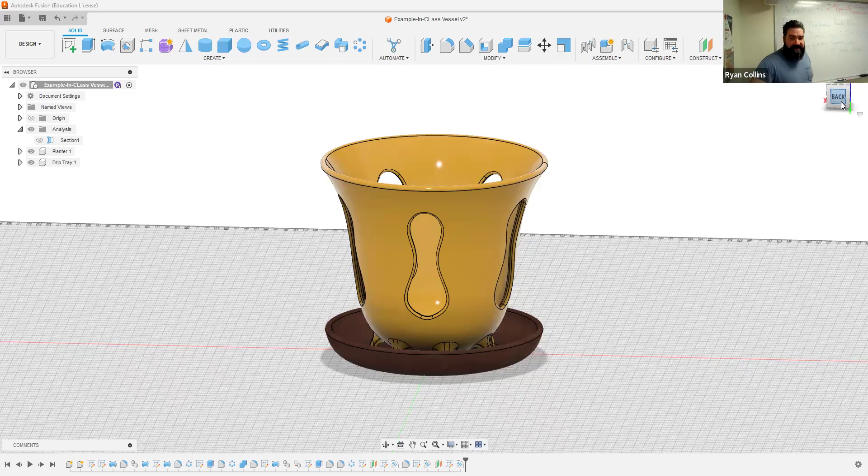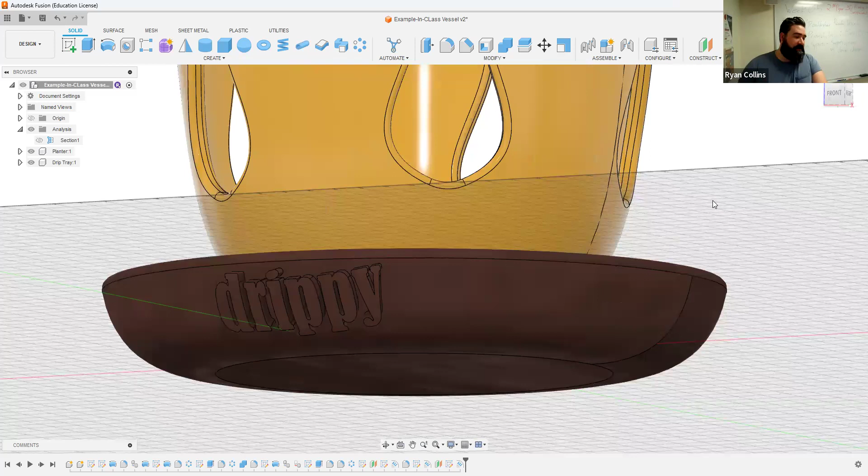All right, so we have our projects that we're working on, your revolved vessels. This is one of the ones that, of course, has holes through the sides, as well as using the revolve tool and patterns to create these little feet on the bottom. And of course, the drip tray as well. They're on separate bodies, they're separate components. The drip tray, old drippy, does in fact have text coming through on or through emboss.

Now, those are the advanced options. The requirement is simply that it needs to have a vessel with holes in the bottom and a tray, both of which were created with the revolve tool. In order to do that stuff, look at the other video.

But I wanted to talk tonight about some of the considerations for how you would go about printing something like this. With our previous projects, it's largely very flat and it kind of just goes right on the build plate. No problem. But with this, there's some considerations, mainly that something like this is going to require supports.

And I wanted to talk about ways you can minimize supports, simply because not that it's going to waste a lot of material, but it is wasted material. And if you're printing on your own, well, you're paying for your own material. And if there's a way to not waste as much, yay. So let's go ahead and kick these out of Fusion and get them onto our slicer.

So in order to do that, we just go to the object, whichever one it is. Now, you don't need to select the entire component. You can just double click on the object itself, but because these are separate components, you're good. If these were both bodies on the same component, double clicking will sometimes select everything within that component, at least body wise. It's not going to select sketches, stuff like that, but there you go.

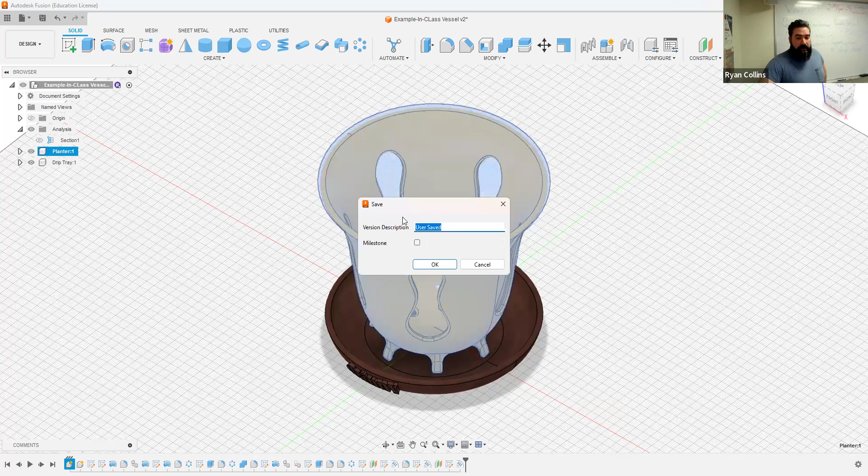Oops, not save. So in order to get that out, go to File. Now, again, we're going to 3D print, not to export. Export will save this as a Fusion 360 file, not as an STL. Now, we will discuss the differences between file types later, but for right now, this project, STL is fine. So we're going to 3D print.

Your toolbar comes up, and you can select preview mesh if you want. I don't bother. Refinement, high, sure, why not? Now, deselect the send to 3D print utility. You can send this directly to a slicer and it's all set, but I want to discuss some of the options built into the PrusaSlicer. So we're going to turn that off. Uncheck send to 3D print utility, you're all set.

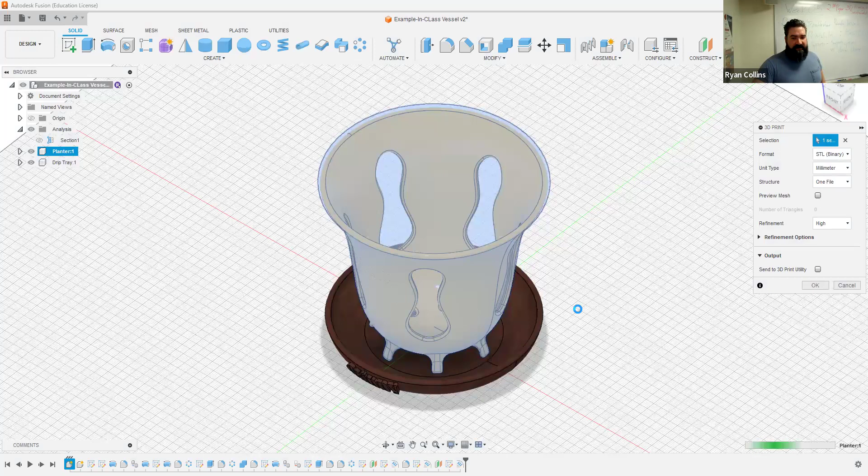Go to OK. All right, where's this going to go? Somewhere on your computer. Great. I have planter. Done. That's going to save. That's going to kick that out. And it automatically does that. I don't know why Fusion, sometimes when you complete a command, it keeps switching screens. I don't know why it's doing that.

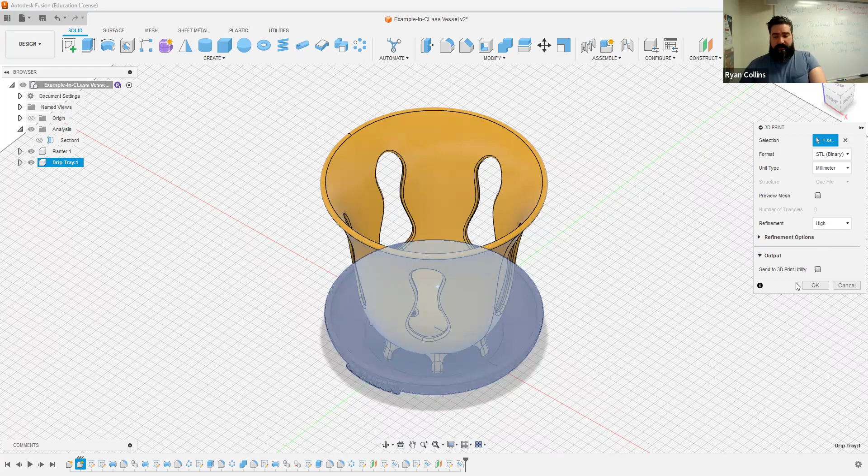Do the same for the drip tray. Double click. 3D print. It's going to save your last selection, meaning you do not have to uncheck send to 3D print utility every time, unless you have closed Fusion and are restarting it. Hit OK. Check the name, just in case you need to name anything. Now it's drip tray, so at least there's not just body 1 and body 2. Yes, replace it. I already had it in the file folder.

Okay, so now let me hop over to the PrusaSlicer. Again, I have an outdated version right now. Definitely update. I'm currently on 2.6. It's up to 2.7.1, so definitely update anytime you can. So let me drag and drop over. You can, of course, import a model, all that kind of stuff, or you can simply open up the file and drag and drop.

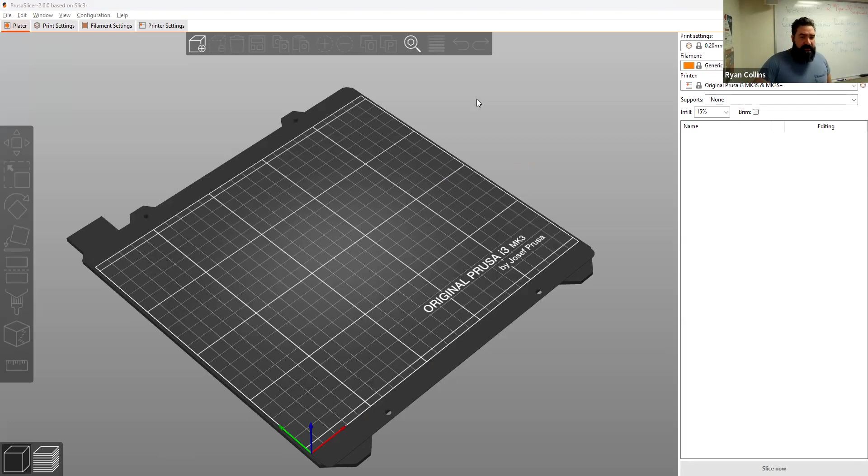Now, depending on how big your project is, you may not be able to get both on the same plate. And frankly, sometimes that's for the best, because if you are printing something that's much more complex and has multiple parts, yes, of course, the whole point is to be able to load multiple components, multiple objects onto your build plate so you don't have to babysit the whole thing.

If your print fails and you've got a 20-hour print with 2 different objects—say one takes 1 hour and the other 19 hours—I'd go ahead and print the 1-hour thing first, get it out of the way, then set up the 19-hour one. That way you're not waiting part of the way through, like 10 hours in, and having it fail and ruin both parts. Pick and choose your battles.

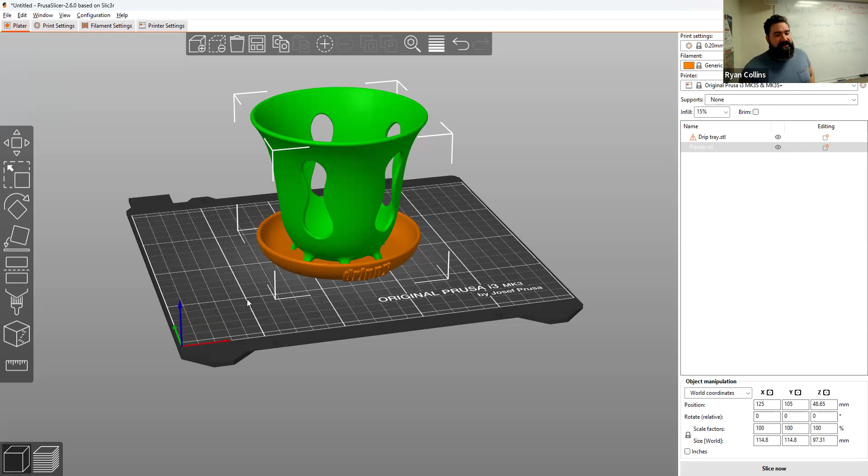Now, if you want them to be separate, you cannot print this as is. Go up to the top, you can either arrange by hand or select auto arrange, and that's just going to move them around.

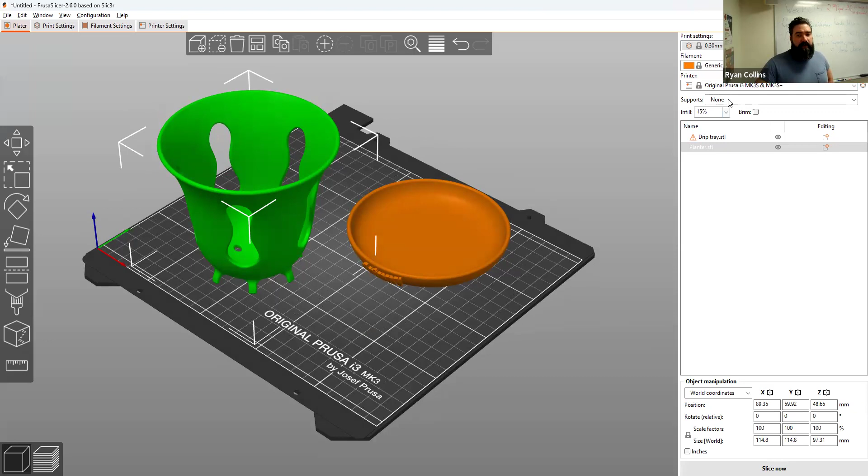So outright, we're going to go through problem areas. Right now, I could just use the standard settings, even go to draft quality to make it go faster. Currently it's selected with PLA, and we'll just leave it at 15% infill. That's fine, let's hit slice now and see what happens.

This will go fairly quickly, but the problem is you're going to have a lot of problems with this outright currently. So right now—well, that's surprising, that is less than 6 hours. That is a 5 hour and 36-minute print. That is frankly kind of impressive.

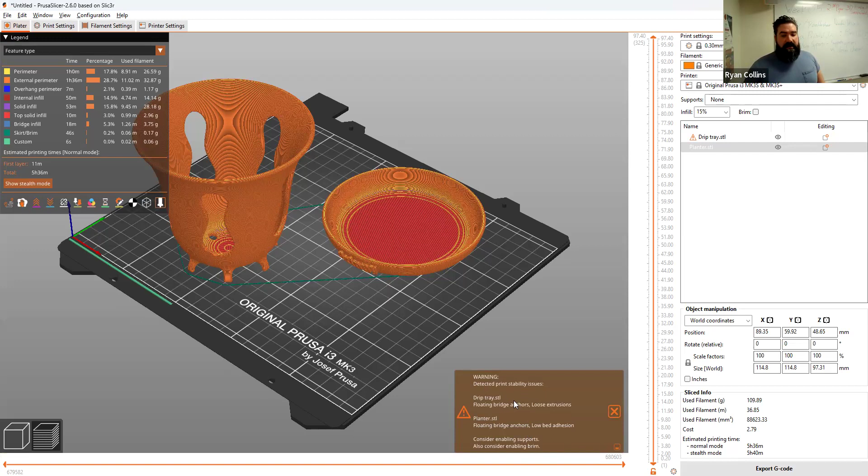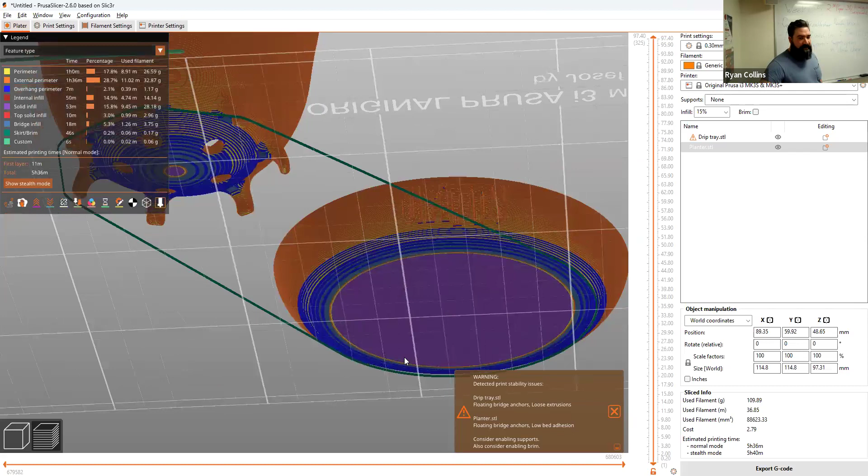However, there's a warning: detected print stability issue—floating anchors, loose extrusions. What that's meaning is when I orbit underneath, the overhang perimeter all in blue, that's an issue. What that means is the tray will more or less print okay, but the vessel will not. It's making minimal contact with the build plate.

That's not really a big problem, just those little feet, but currently the bottom of that vessel doesn't touch the ground. You can't start a print floating in space, it has to be supported. So that's what this means, that's what these errors mean. Let's go back and switch over to plater mode.

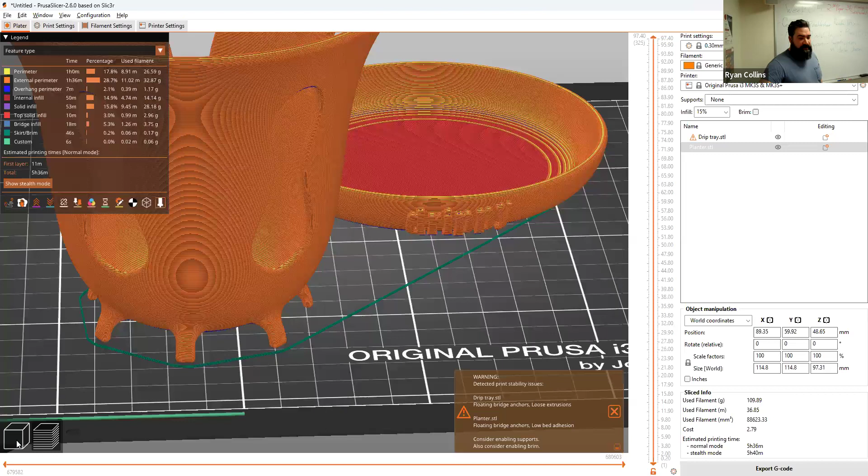And for one, let's just try supports from build plate only. Let's see the difference.

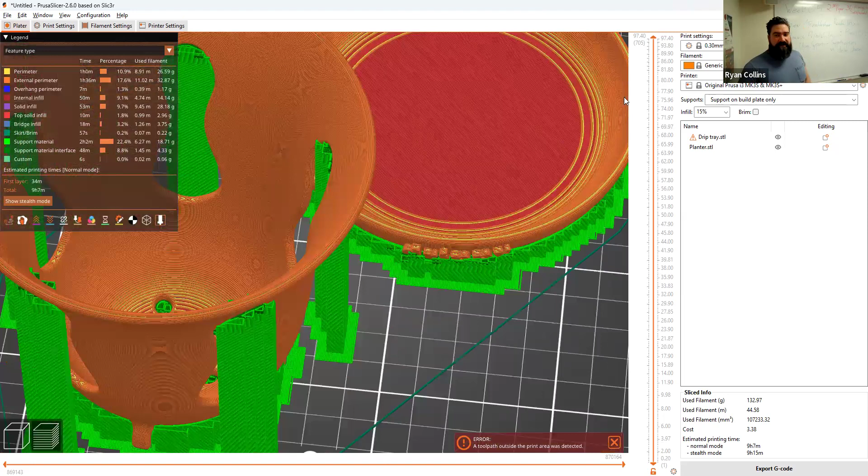What's going to happen is it's going to auto-generate supports—these are the scaffolding shapes. Right now the default setting is these rectangular forms, and I can use the cut-through view and slice down through to get a little bit clearer view of what's being seen.

So these supports, obviously, are supporting, at least up top where that big hole closes, because it needs a little bit of support there. The problem is that's what I was talking about—a little bit of support has to build all this whole thing up. Maybe I can find a way around that. The other thing is, of course, at the bottom.

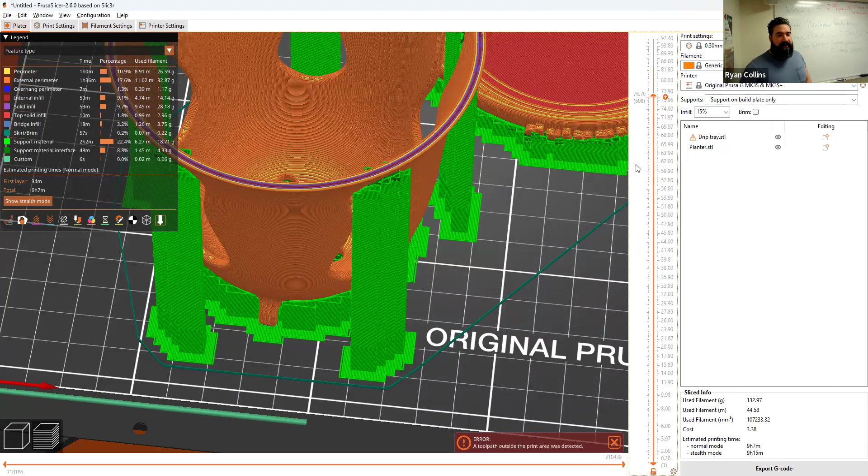As I slice down through, it has to build all of that support to create that. So right there, not that big a deal, but it does create a lot more material. Also note the time change—without supports it wouldn't have printed that way, it can't print that way, it wouldn't be a successful print, but it would have been a 5.5 hour print. Now it's over a 9 hour print because of all that extra stuff.

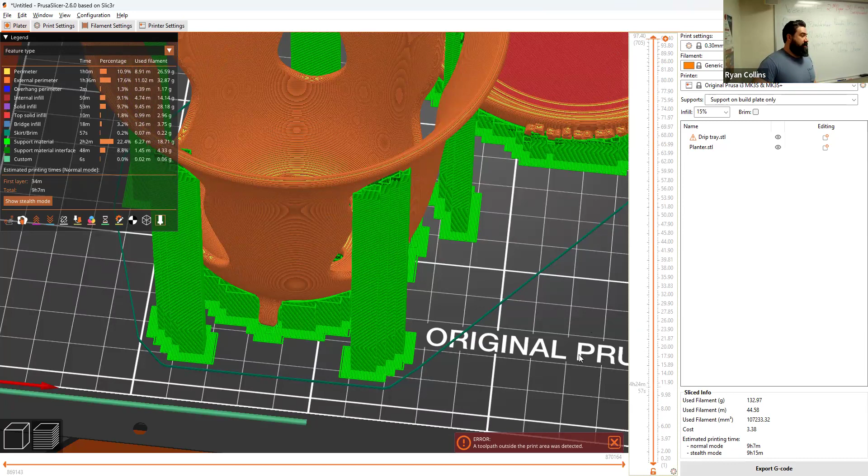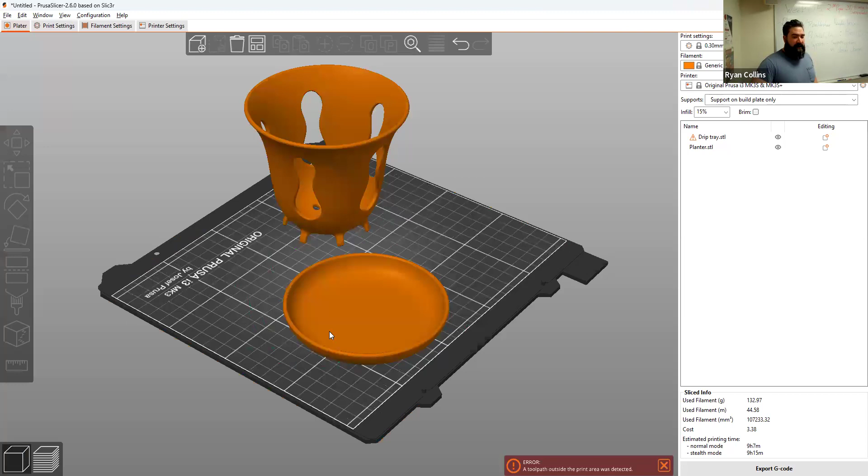Also, where it's currently oriented, it's giving me an error that it's also outside of the build area—that's why everything is orange in the background. All that means is something went out of bounds. So the auto arrange isn't always the best. All you've got to do is go back to plater and just literally move that over a little bit, and it'll be in bounds.

So sometimes the auto plater doesn't really put stuff where it needs to be, but that's also because I had originally arranged everything without support selected.

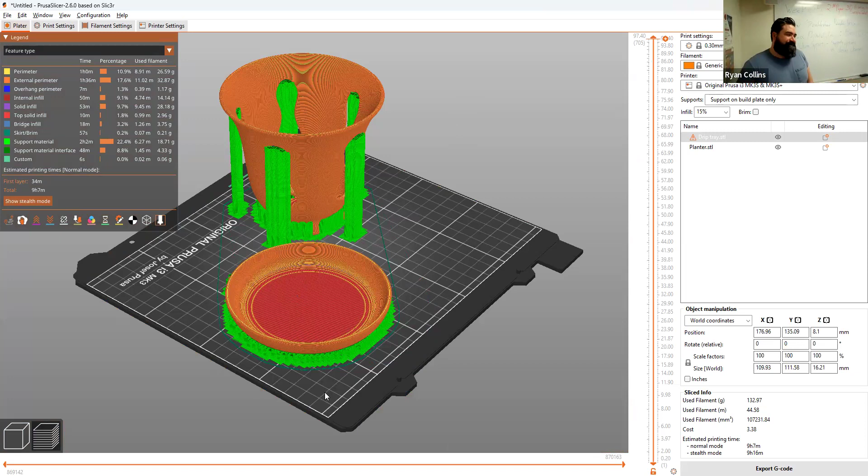So, all right, well what can I do to speed this up? What can I do to fix this? Well, a few things—the tray, that's going to be pretty much how it is, that's going to work about how it is. If it's a low tray, something like that, you're kind of stuck where it is.

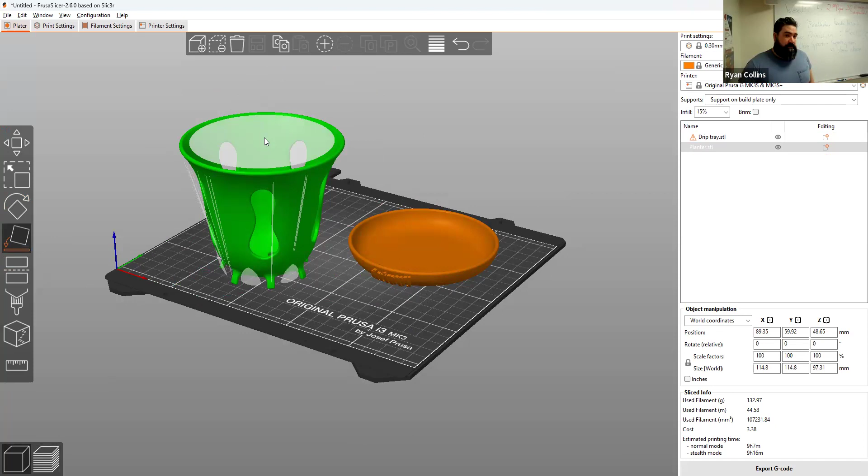But let's try flipping this cup around. Select the cup, and instead of the rotate, I'm just going to select place on face, and flip it 180, upside down. All right, probably a similar issue, but let's see what comes of it.

So now that entire lip is making contact with the build plate, and it's still telling me there's an issue, so I just got to move that over. What is outside? Everything. Oh my God, I think I just killed it.

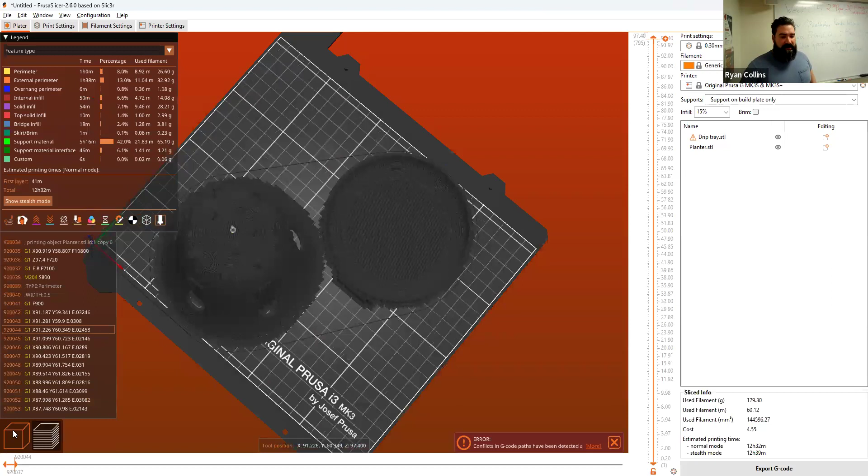All right, let's move y'all over a little bit. There we go, try it there. That's just shifting it around a little bit. Should everything be in? Yep, now it's all in bounds.

We're good. Okay, oh, that made it so much worse. But one of the major things is outright, it's going to have to print all of that internal. There's ways we can fix this.

Speeding it up, meaning, because going from what would be possibly a 9 hour print to 12 hours, that's a little excessive. So let's find ways around that.

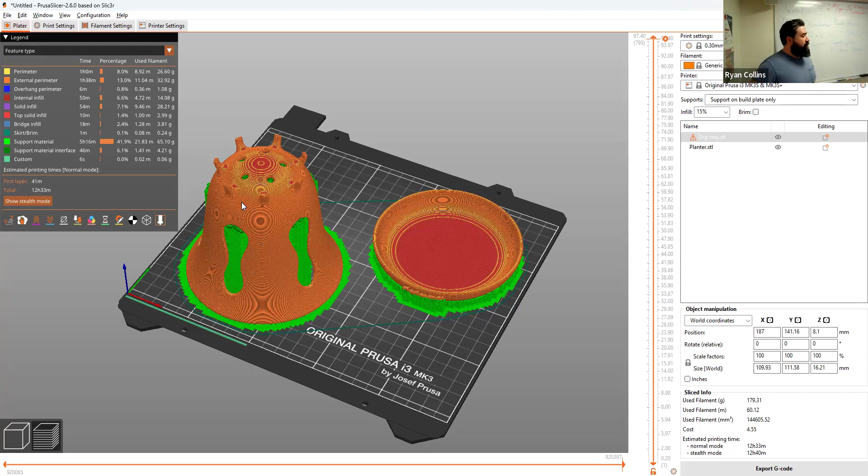But one of the main things is this is a much stronger, more stable print with this cup turned upside down, because these little feet make such minimal contact with the build plate. It's very likely that the print head, as it's moving back and forth, can knock those off before it ever gets a chance to build together into one solid piece.

So the cup flipped over, that's an excellent solution. All right, so let's see what we can do to reduce some of this. Go back to Plater, and we're going to go to print settings.

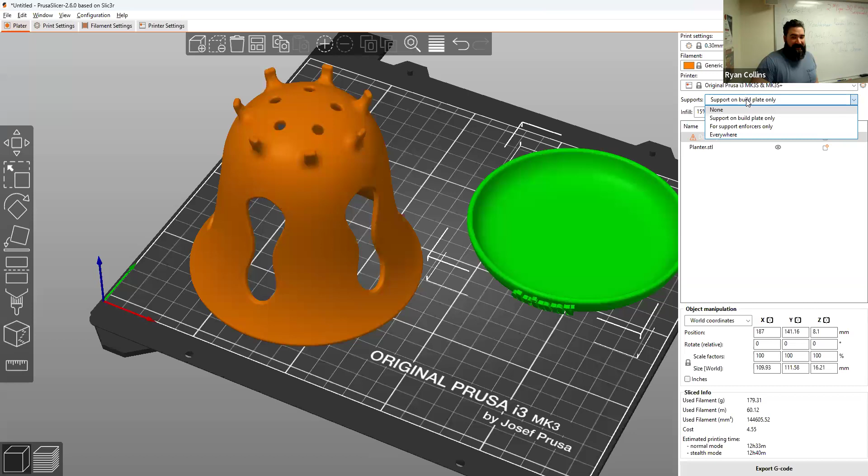Now, obviously, we can play with the build plate supports everywhere, but honestly, right now, I think support on build plate only is probably the best option. Let's go to print settings, and let's go to support material.

This is where you can dial back things like the type of supports. Grid is the default. We have snug, and we're going to talk about organic in a moment because that's one of the new options. Snug is just a different version. I'd leave it at grid for right now.

Now, one of the other things you could do is play with the pattern. We have rectilinear, grid, honeycomb. Just to show you the difference, what does honeycomb look like? Probably looks like a honeycomb.

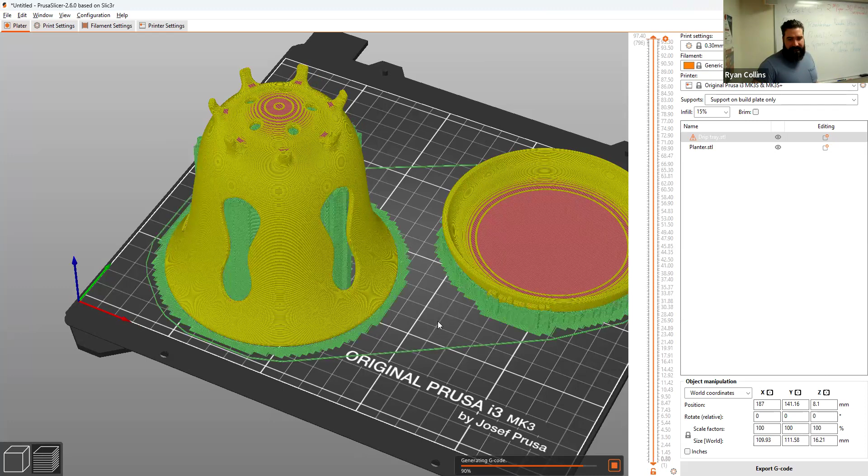Even longer. But just to show you a different type. So when would you use this? If you had an even more complex shape, because there's more support going through here. The reason it's taking longer is because rather than being able to print just back and forth in an arcade style, it's got to make each one of those cells before starting the next one. Just makes more work for it.

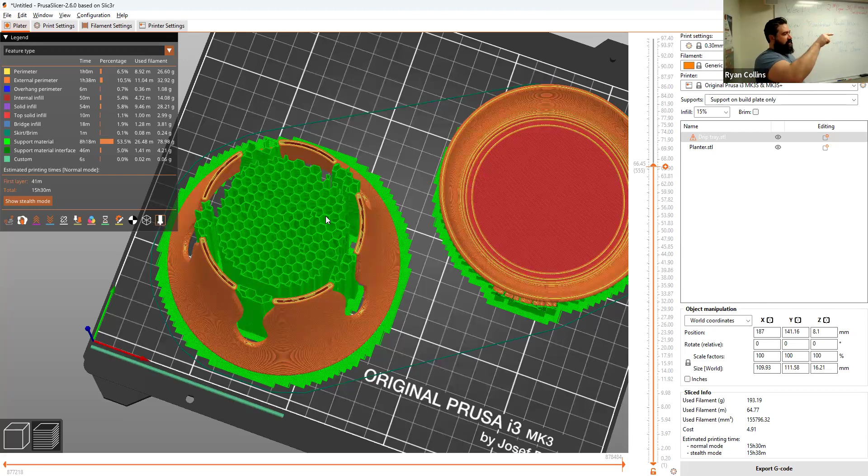That's all. But one of the things we can play with is the spacing. So let's go back to print settings, support material. Apparently, let's go back to rectilinear. That made it a lot faster. What we can do is play with the pattern spacing.

The default is set to a spacing of maybe 2.5. Let's bump it up to 5 millimeter spacing. So between each one of those rectilinear lines, let's make 5 millimeters between them instead of 2. Let's see what happens with that.

Come on. Okay, so that dropped a fair amount. It's still a lot higher, but it sure isn't 12 hours. So that makes it a lot better, and you can see how much more spacing is available there.

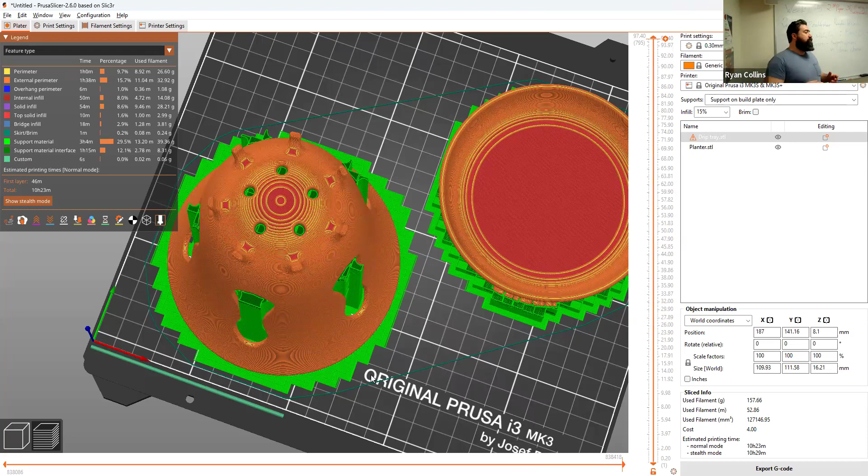All right, so that's one of the options. Now that's a pretty standard way of working. These all do remove pretty readily. We can, of course, try out the other one, what was the rectilinear, and oh, not grid, let's try snug. Just curious.

Let's see what happens with that and this form. Ultimately, this is also a really complex shape because of all the openings and such. If it weren't, we could definitely get away with a lot less support. All right, use the snug setting.

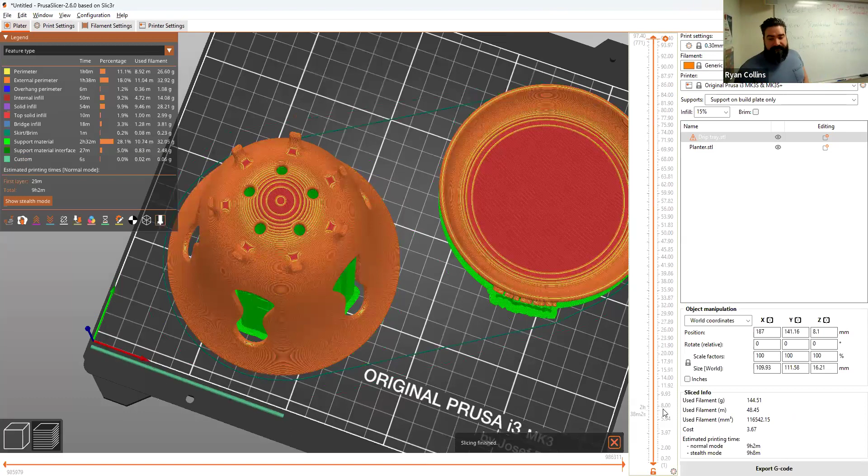It doesn't really need supports in this area, the top of that form, but it definitely needs some supports in the center, not because it's domed, but because it has the drainage holes. If there were no holes on this, it really would probably not need the supports at all. It's just because it has to create those holes.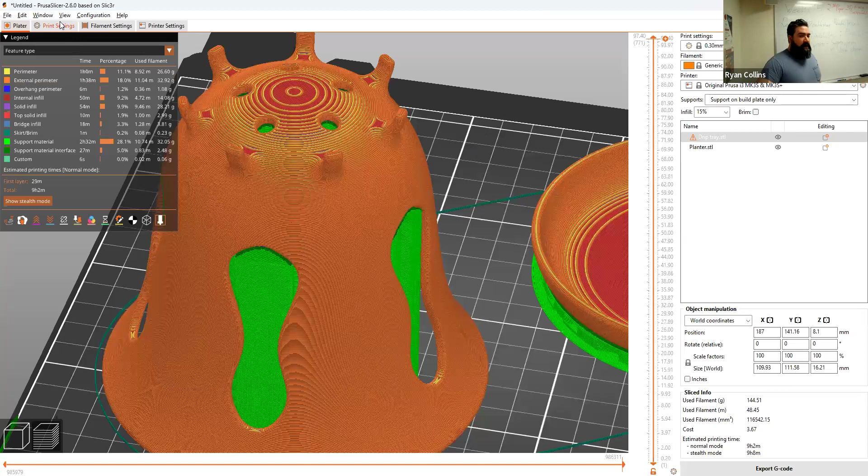All right, rectilinear snug, that's a pretty effective drop in time. The other one I want to show you is a new addition to a lot of slicers, and it's called organic. So we went to snug, organic. Let's try this one, style, organic.

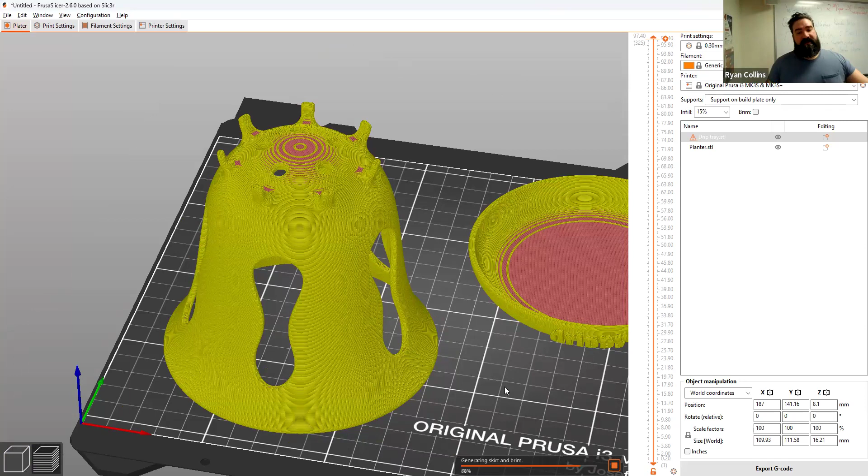This creates, instead of a straight up and down scaffolding, this creates trees. So this is kind of based on fractal technology, and it can create really surprising reductions. That just dropped it down to 8 hours. I just dropped from 9, which was a good drop from 12, but that dropped it to 8 hours.

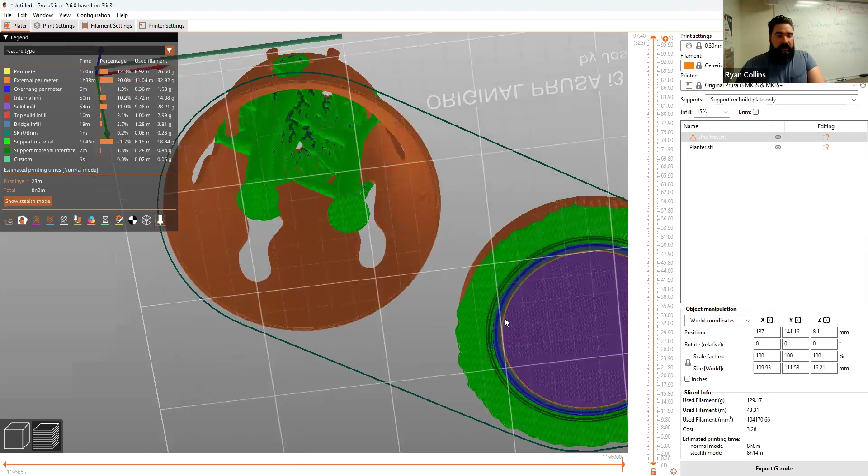And I want to show you what it's doing here. It makes these tree forms. So rather than having to have all of that grid work, selecting organic can create - it's not always going to be the solution, but it can create these support trees that are more like a model kit runner rather than an entire set of scaffolding. If you ever built plastic model kits, you see all the little runners, all the little plastic bits.

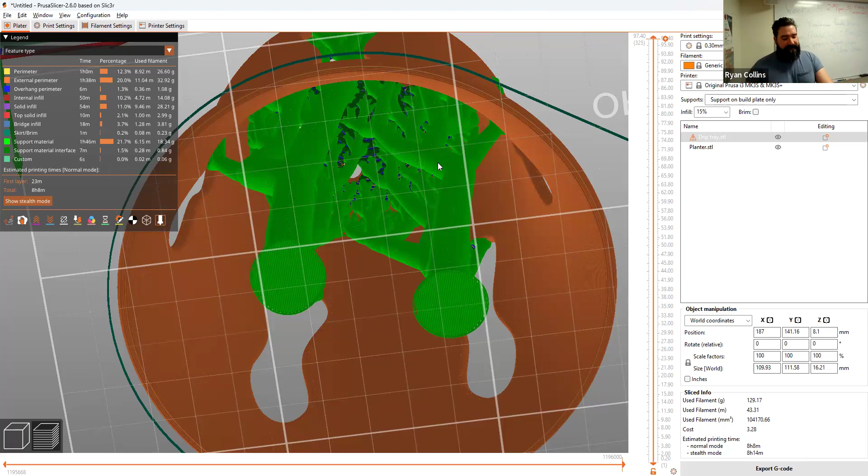So organic can be an excellent solution. It's not always going to be the solution - sometimes it throws a little bit extra stuff at you. Ultimately, one of the other solutions is going to be just to change your project a little bit.

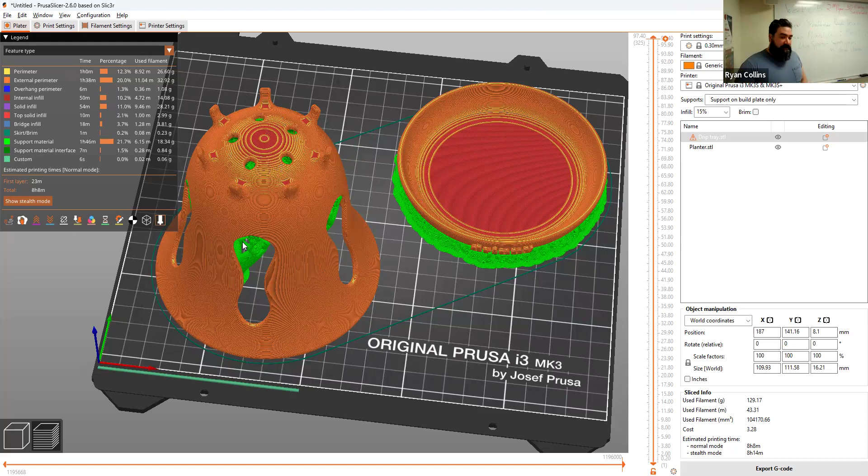Sometimes you're going to find things like sharp fillets might be causing more issue than they're worth. Maybe instead of something with an entire floating section underneath, maybe just make it a little more solid. Or maybe because these holes on the sides, if they had been straight across, it might have been able to bridge more easily, meaning the printer head could go back and forth more effectively. These are things you'll find that can improve your printing speeds.

But ultimately, we really just want to find ways to make it finish faster. That's really it, with the side benefit of obviously using less material.

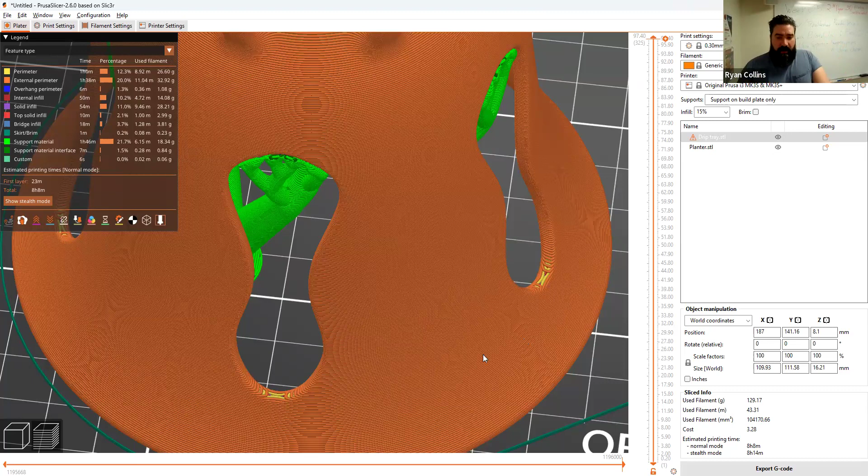So, all right, using organic supports, and we did change the settings a little bit. Again, pattern spacing is also out to 5. If this were at the original setting of 2, just to show you the variation there.

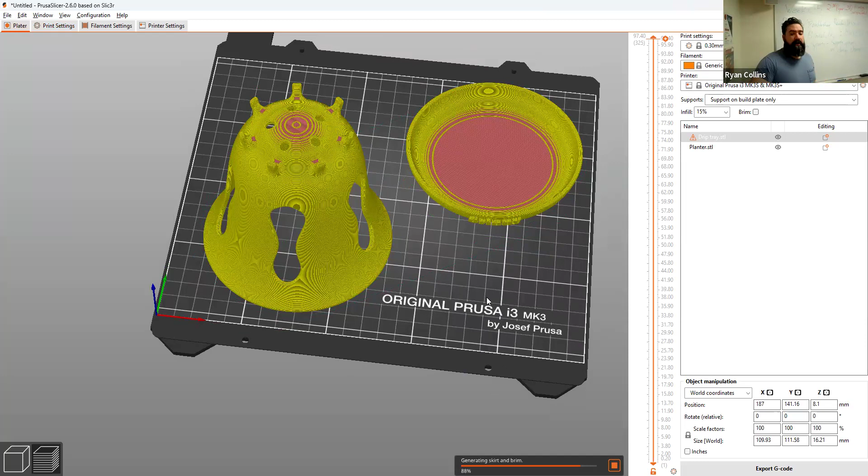Come on, buddy. All right, that actually didn't change at all. That's all right, but that's revealing. Well, now we know that also the pattern spacing on this particular project, it didn't really change that.

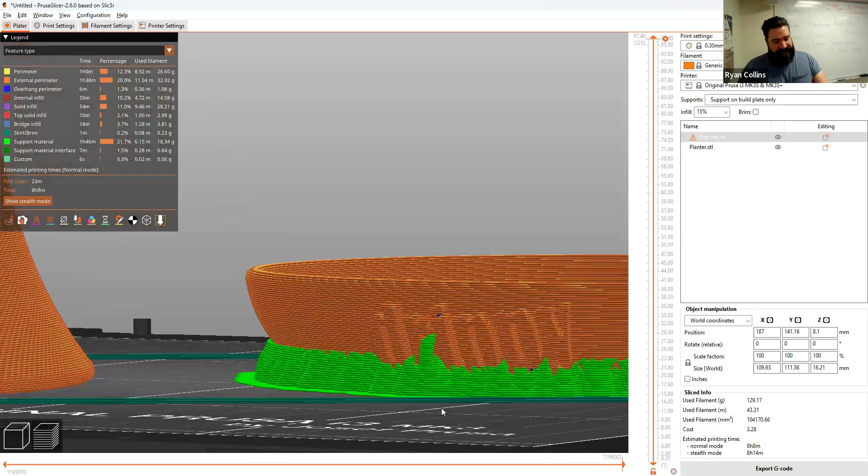Now that's all dealing with the cup. Let's zoom in a little bit on the dish. So the text, because it's extruded, or rather embossed outward, which is what emboss means, it's going to require more support. The other issue is the reason it's supporting all the way around.

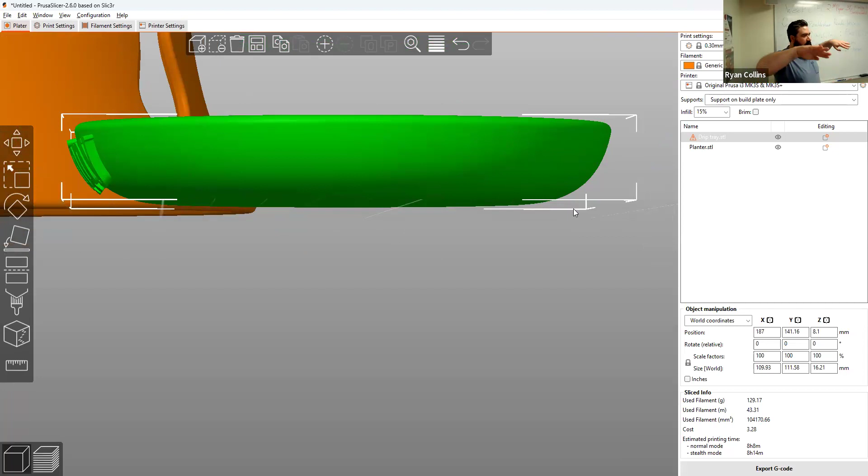Let's go back to the plater. It's because the dish has such a shallow upward curve. Let me hop back over to Fusion and I'll show you the difference there. Main thing here is this heavy curve.

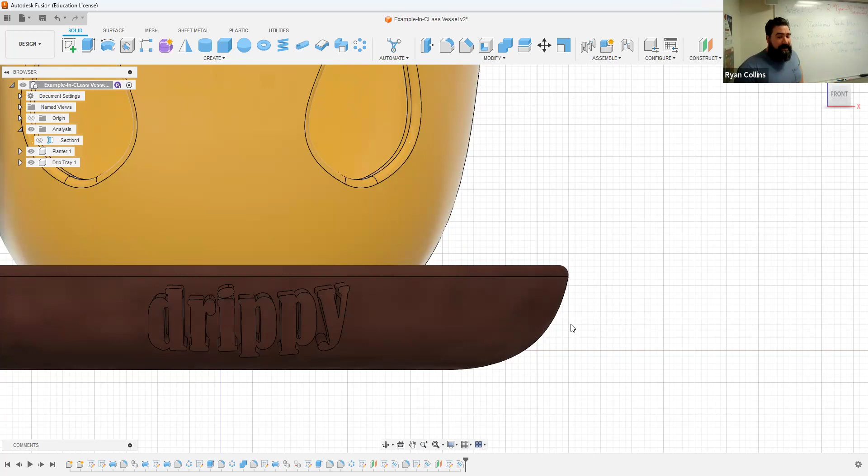It's pretty much a simple arc, but if we were to bring the angle upwards a little bit, just make it a sharper incline, it would eliminate a lot of that. The other thing can be - well, this emboss here, maybe it doesn't need to be that far out. Maybe it could be a deboss, which is extruding internal, kind of like that.

Or one of the other things you could do, and this isn't always going to be a solution, is add fillets, add chamfers to these. Because if you create a transition rather than a harsh outward projection, you can eliminate some of the need for supports.

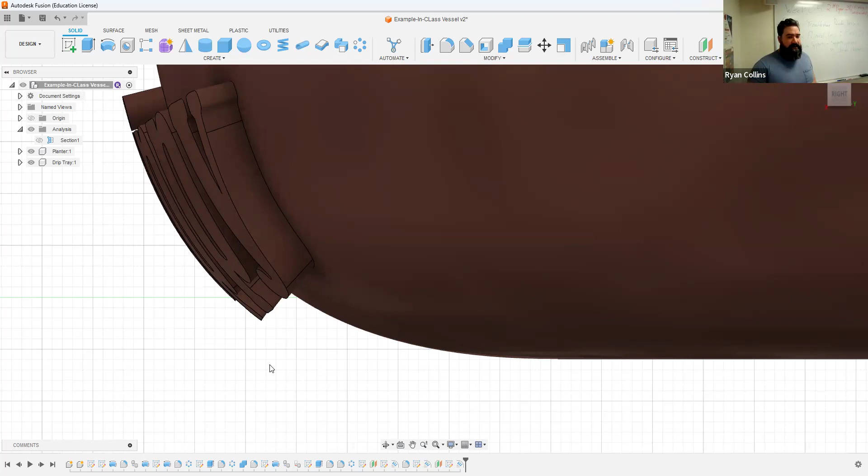And again, one of the main things with that is it just speeds up your print and can potentially make it stronger. So just out of curiosity, let's have a look at this and see what happens if it'll let me, because with text, fillet and chamfer don't really like to work that often. But let's see what happens when I apply a fillet all the way around. That's going to do all the things, so I doubt this will work.

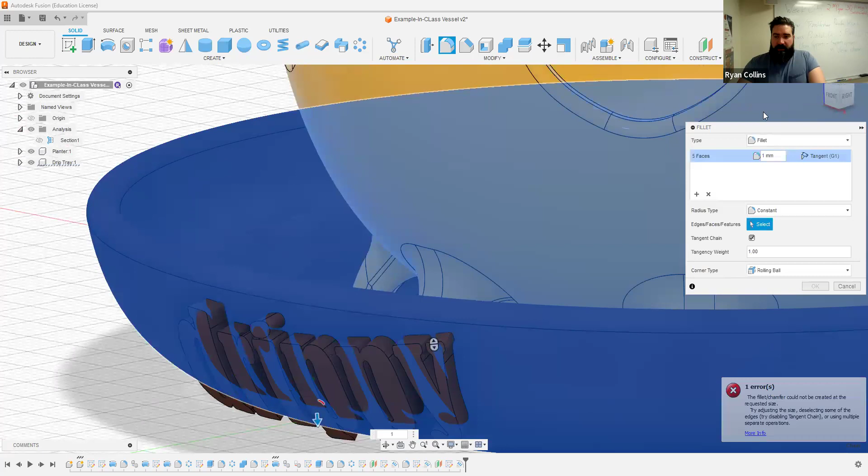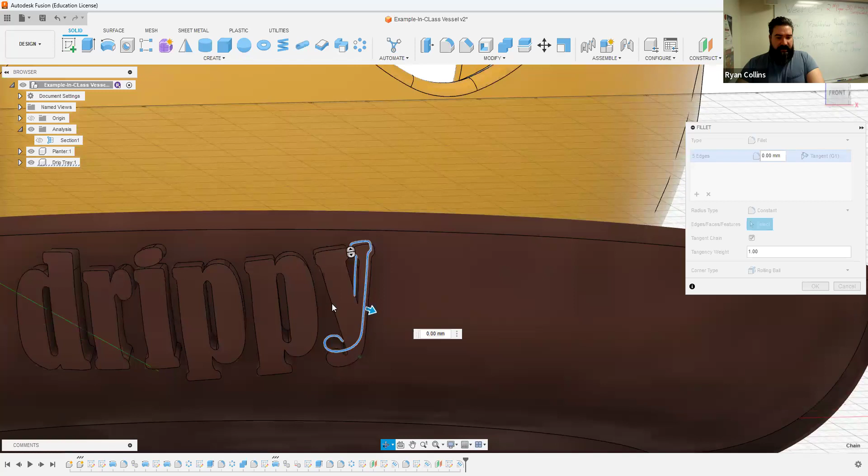Yeah, error code all around. All right. Ultimately, with something like this, you're probably going to have to, with a fillet. Come on, buddy. I think I just confused the computer. There we go. You're probably going to have to go around and select edges individually, so this gets pretty tedious. I'm not going to go through all of it, but just showing you the difference on something like that.

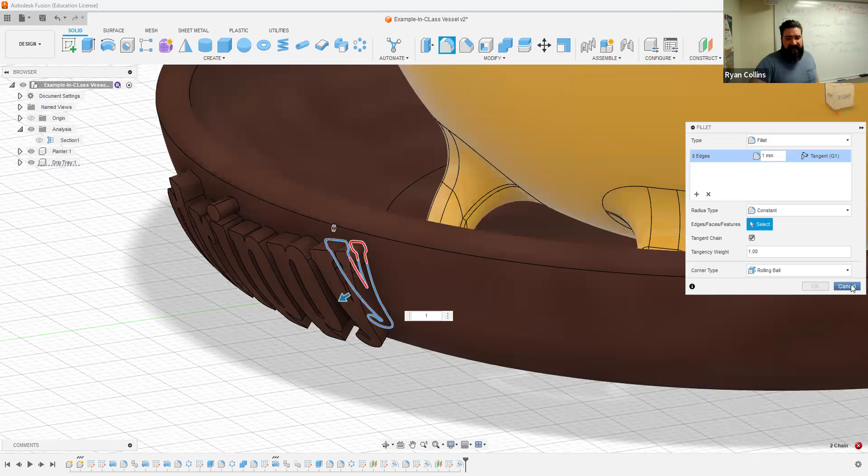Let's try 1 millimeter fillet, if it'll even calculate. With very sharp corners like that Y, yep, there it is. Sometimes they will not apply. So something like this, ultimately, fillet isn't working for this one. So probably just go back to the emboss and just shrink that a little bit. Edit feature, instead of a 2 millimeter emboss, maybe make it a 1 millimeter. And it won't have to go out nearly as far.

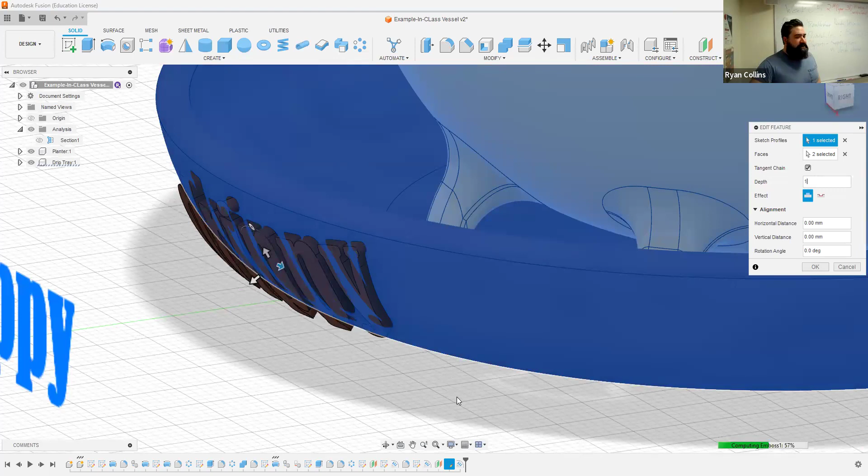It's a minor change, but it keeps doing that. It's a minor change to your project, but doing little things like that can vastly improve the printing speed and also the printability in general. Makes it a little bit stronger, makes it go a little bit faster, makes it work a little bit better.

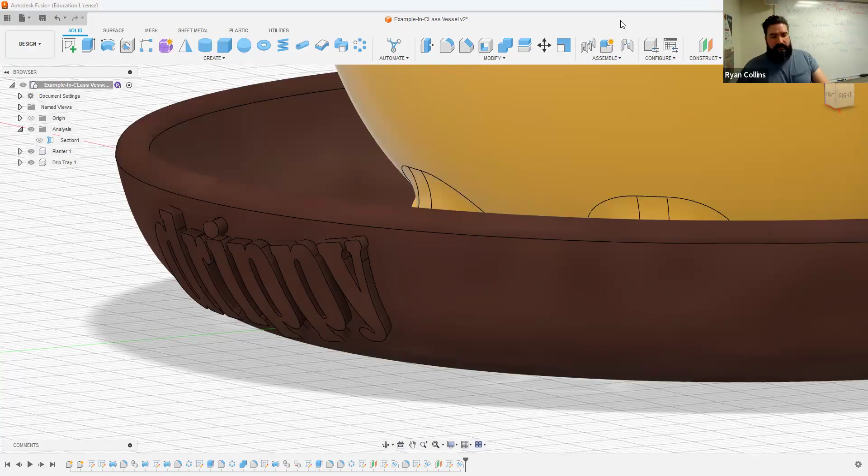So that's the combination of tools you can use for this, as well as obviously hopping back over to Slicer. Obviously making some changes to the type of supports you're using, should you have to use them, and the spacing on them. Then you get out to, oh, didn't need to export it yet. Obviously, you export it when you're done, but going back over to the sliced view, the preview, and of course you get a rundown.

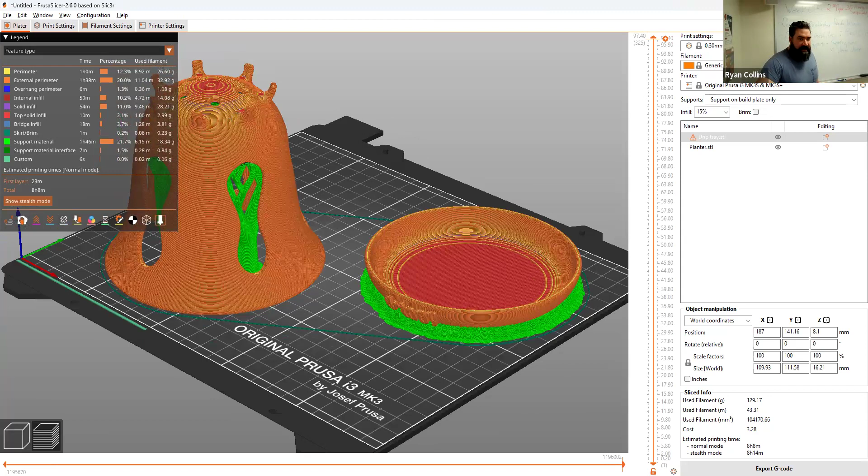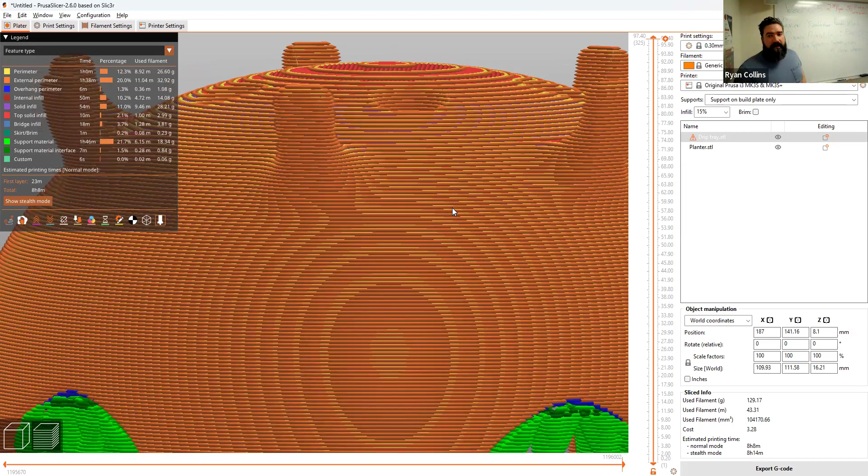One last thing on that is with these heavily curved forms, currently I have this on draft speed, draft distance. As I zoom in on the bowl, you can see what happens with soft curves. Because this is working layer by layer only on the Z axis, as curves come inward, once they start to get to that peak, it starts to get a little bit choppy. You can adjust that obviously by going to like 0.2 settings.

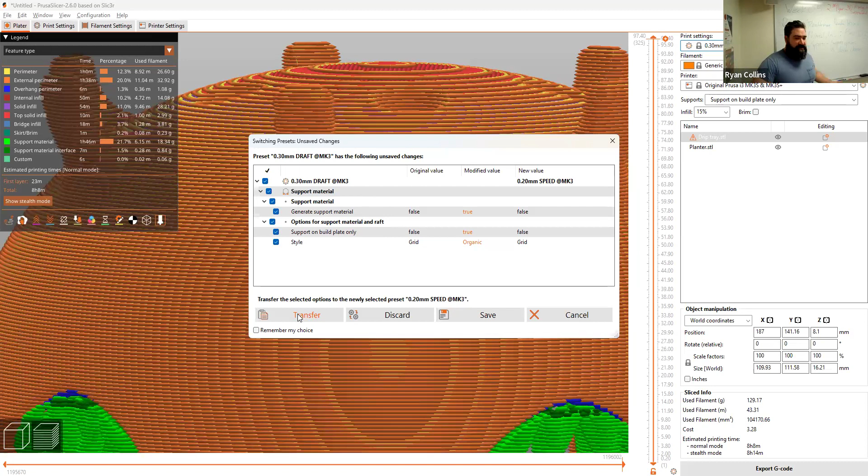Yes, transfer everything. There's a button if you decide, oh, I want to change the print settings from draft to finer. It'll bring up these options. All those adjustments we made, like the style and type of supports, to spacing, and all that such. You can hit transfer and it'll just change all of those and recalculate everything. It's all right. It disappeared. That happens. It's only because it's recalculating, or it has to be recalculated when you just hit slice again. So you didn't lose anything. As long as you hit that transfer button.

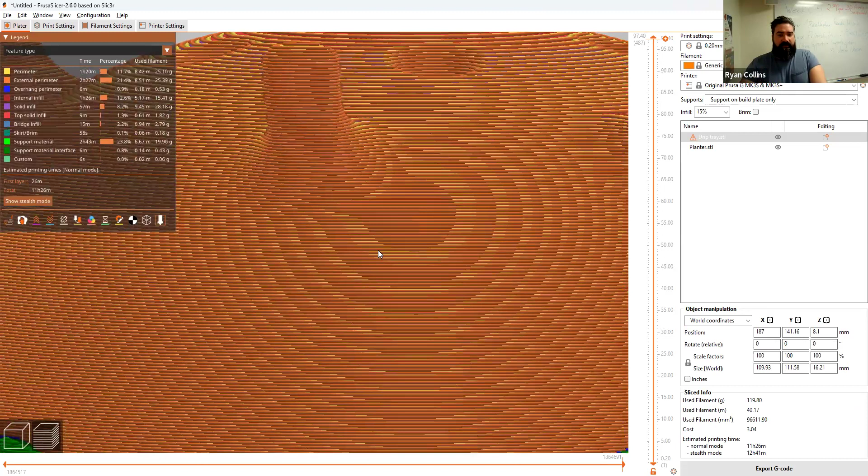Thinking and thinking and thinking. Because it's finer detail, now it's making that many more layers. So this is going to add to the overall time. Now we're back up to 11 hours. So you see the difference of just going from 0.2 millimeter quality to 0.3 in draft. You really can up the timing. But if you really needed detailing on those curved surfaces, it did add some more levels. So take that how you will.

Honestly, with something like this, draft setting is probably just fine. And if you really want to drop it down, print these in 2 parts. Don't print them at the same time. You're going to definitely up your chance of failure should it fail. Very low rate of failure on these, but hey, everybody knows that. Of course, it's going to fail when I do it.

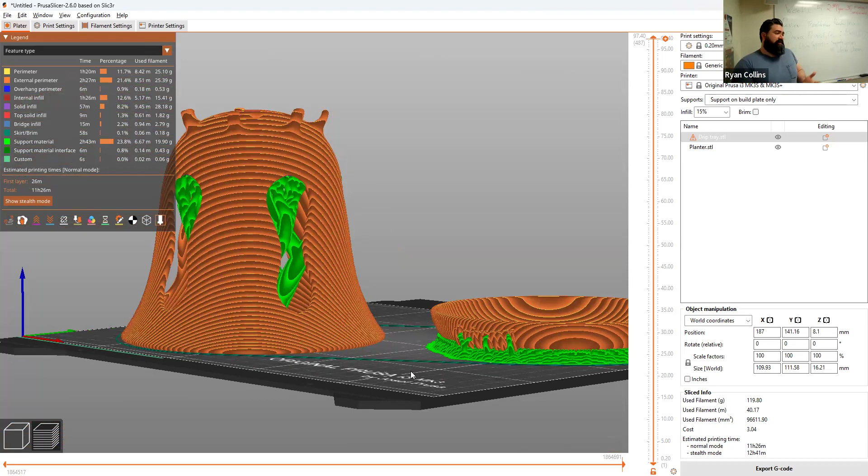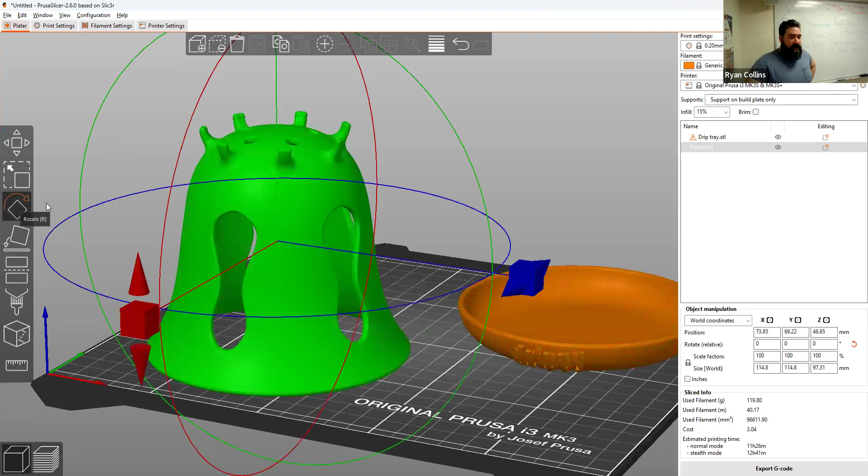So there you go. But that's the rundown of adjusting your project, reorienting your project, and playing with the different support settings to improve printability and that sort. So hopefully it works for you, and ultimately play around with it. Heck, try orienting it, just changing stuff around. With this project, that's not going to be a good solution, but with other ones, it might be. So play with them, see where it gets you.